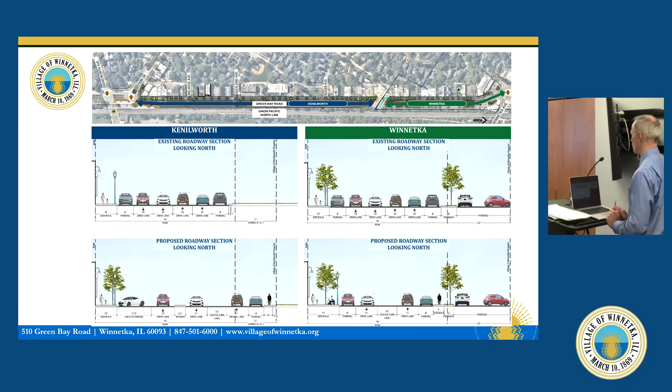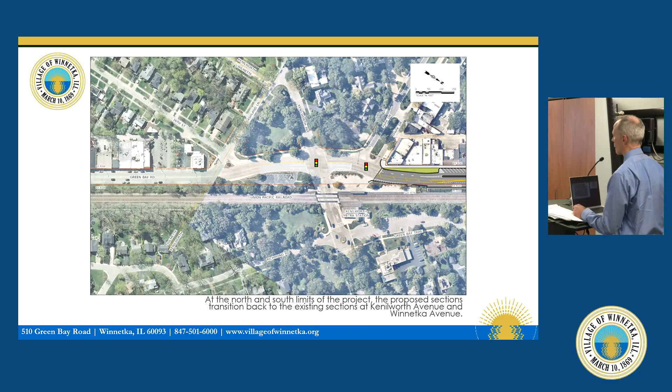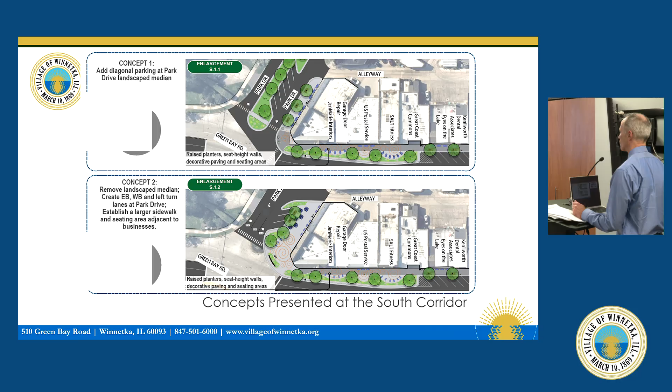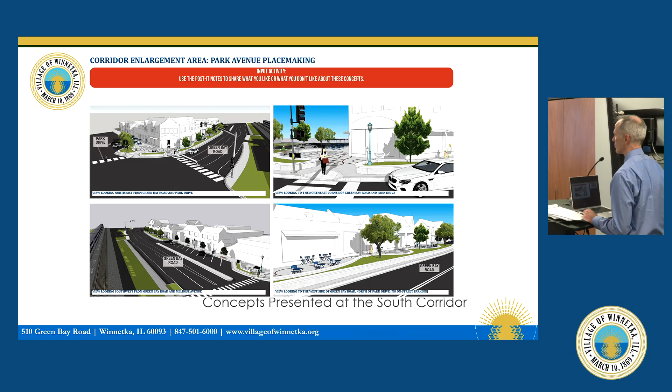Looking at the aerial views here, kind of starting at the south portion of the project, we'd be tying in at Park Avenue under the proposed concept. Some things that were looked at here as concepts were incorporating some diagonal parking along Park Drive, both on the south for one concept and on the north side for the other concept. These are shown here, and then also in this slide, there's some 3D images indicating what those options could look like.

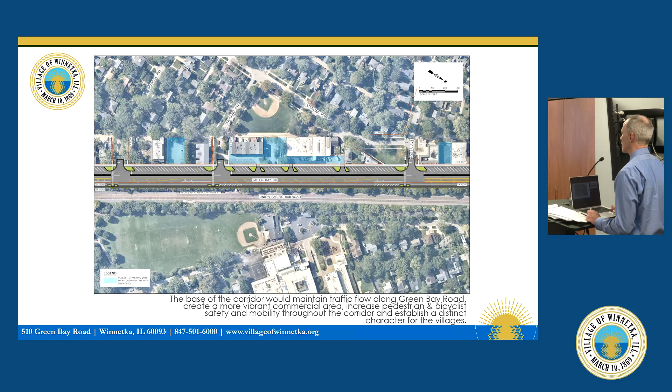Moving a little bit further north, here you can see the proposed plan and the diagonal parking that will be incorporated into the portions from Kenilworth. Within this area, as I mentioned before, you have the diagonal parking separated from the 3-lane Green Bay Road.

Here's some details of the area. The area on the right shows by Wayland Avenue what the section could look like. Essentially, you'd have the frontage roads with diagonal parking in that area, and here there'd be some proposed locations for crosswalks in the area.

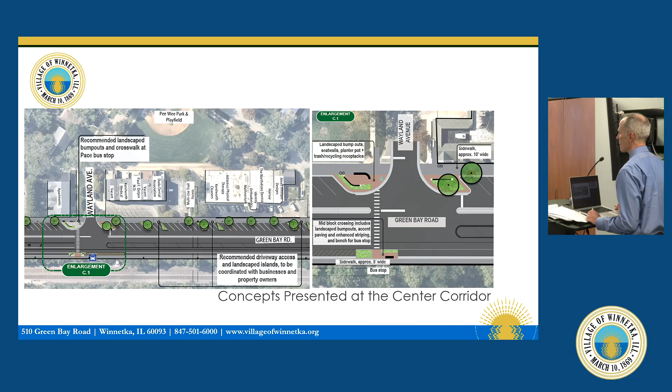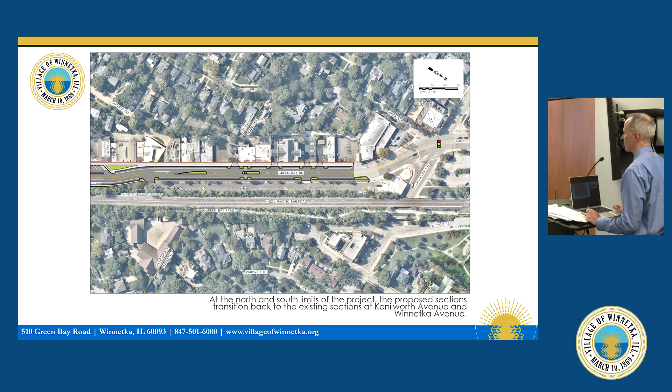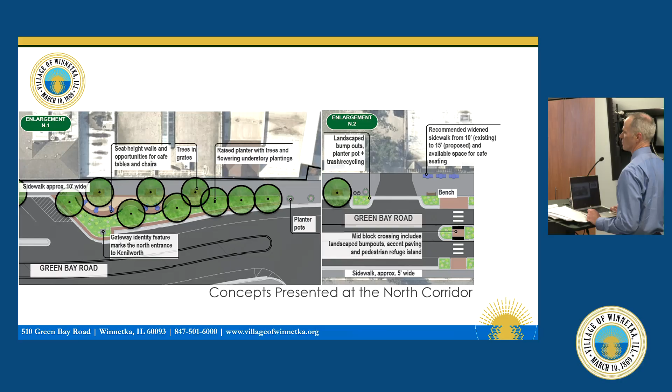Just for clarity, that's south of Winnetka Avenue, right? That view is all just up to Winnetka Avenue. Okay, yeah. Everything ends south of Winnetka Avenue.

Some other things that were looked into were different types of lighting standards, some gateway identity features, and then different furnishing options within the area. These were presented at the public meetings where people could cast their votes with a sticky note to place what their preferred options were. Some of the 3 different types were the Tudor on the left side. The middle one would kind of merge the 2 districts between Kenilworth and Winnetka. And the third one featured stone and masonry.

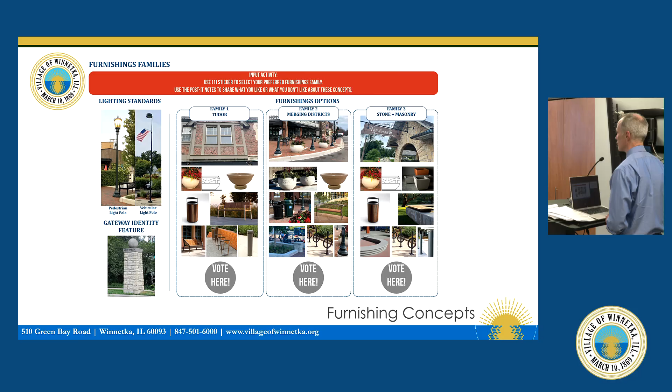As far as parking goes, within the village of Kenilworth, we did an estimate, assuming a 20-foot parking stall for parallel parking. With that, we came up with 162 parking spaces there. Under proposed conditions, the low number that we had with the diagonal parking was 163 spaces, and the high number was 170, but that would involve providing diagonal parking across some of the entrances to parking lots. So the thought there was, there could be some coordination with some of the businesses to see if access to the parking lots could be obtained through some other means, whether that's an alleyway or something like that.

Within the village of Winnetka, the existing parking was 61 spaces. Under the proposed conditions, it would be 55 spaces. The main difference there for the decrease is we provided some curb bump outs for some locations where the pedestrian crosswalks would be.

So as I mentioned before, there were some public meetings in February of 2024, both in Kenilworth and Winnetka. I won't go through every comment, but some of the main comments were that the public felt the road diet was a good idea.

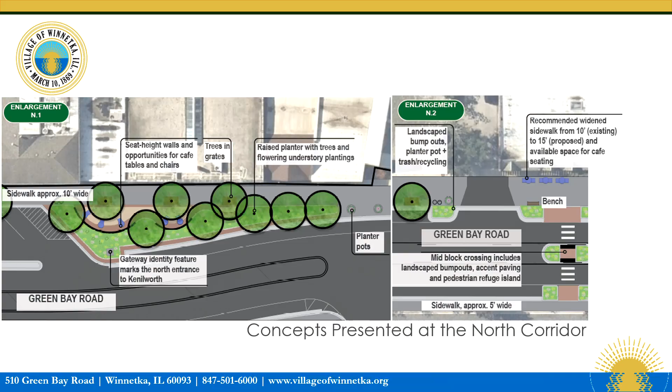Yeah, I think that's a good possibility, and Teska would be more of the experts on how to handle that. But if you have the 15 feet, you can use it in a number of different ways. I'm thinking Marco Romo is largely a takeout delivery service, Aboye has theirs, but maybe they want to reclaim their parking. Who knows? I think it would be helpful to think about how we could improve it, because you just look at that and it looks like a ton of concrete. If we're going to do some improvements, wouldn't it be nice to increase the trees?

So this concept here doesn't include things like, to Mark's point, when we get into the details, we were planning on adding parkway trees like we've done before. So what you'd start to see is a row of canopy trees that would continue through. We'd look at creating seat walls and bump out areas with vegetation, so we'd be enhancing it. This was really just the layout, conceptual, just the structural part. It does look like a big slab of concrete, but our intent was to add trees in critical locations, like we've done in the streetscape. And then put tree grates so we can light them all, with pedestrian lights along the way.

That would be part of the updated phase 2 design conceptuals you would see, like the Teska ones that Jody brings in. You'll start to see this. This was really more about how do we see the roadway configuration going, where do we see the changes being made. The sidewalk's getting wider, there's a center turn lane, but we're adding some median islands. So this was really just about what the layout overall looks like. Those details will be coming as we advance that more.

I think that will make it feel less empty, and may attract some new restaurants, right? Even though it's pretty static right now, or that empty lot that I always wonder why is it empty, next to Captain Nemo's. I don't know if that's Winnetka or Kenilworth. That's Winnetka, I mean it's kind of strange.

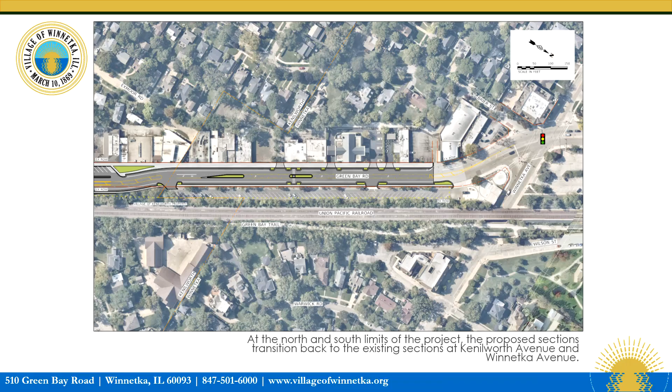Yeah, got it. And anybody who's driven down Green Bay Road heading south, there's always cars that park right at that bend, and traffic merges right into one lane as it currently is right now. This would just solidify it. Any other public comment on this topic? Seeing none, we'll close public comment. Any other thoughts?

I guess I would say, if there's no objection, maybe ask the council to defer consideration of policy direction at this time until Kenilworth determines their next steps, since they're the lead agency on this project. That makes sense, and it'll come back to us, obviously. We'll learn more. Mr. Johnson, thank you very much. We appreciate it.

Okay, well, thank you so much. And Jim, thank you for your thoughts. Scott, thank you. Okay, we'll move on to item ordinances and resolutions, item 9A.

Ordinance number M18-2025, granting a special use permit for the operation of a medical office within the C2 Commercial Overlay District of the village, at 730 Elm Street, Suite 130, part of the One Winnetka project. Tonight, council will consider granting a special use permit for the operation of a medical office in the One Winnetka building. Community Development Director Scott Mangum is here to review the topic.

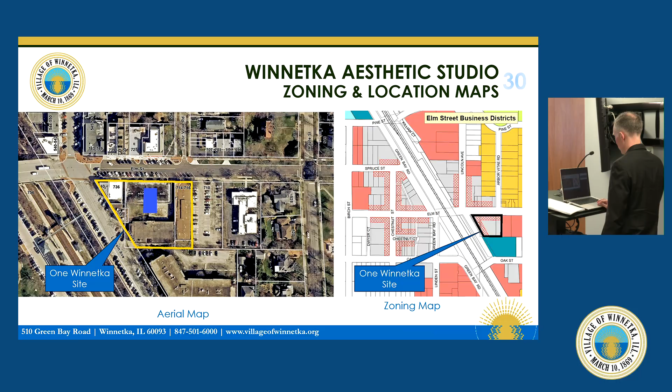Hello again, Scott. Thank you. So as stated, this evening the applicant, Winnetka Aesthetic Studio, is proposing to open a Winnetka location of an existing cosmetic surgery practice that is currently located within Chicago. This would be located within one of the commercial spaces in the One Winnetka building. This shows the location, as folks are familiar, at Elm and Lincoln, currently under construction. The property is located within the C2 general retail commercial, and a portion of it's within the overlay district.

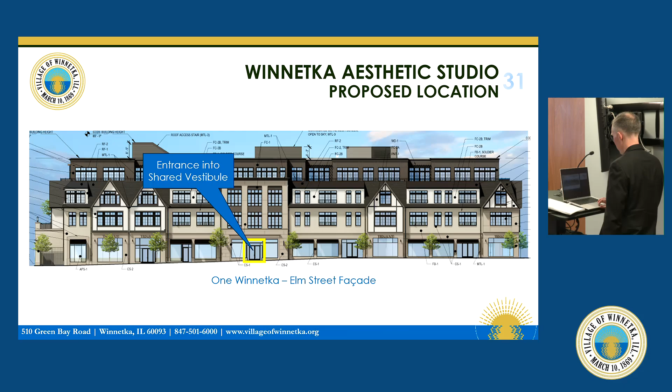So the proposed entrance to the location is outlined in yellow here, off of Elm. The tenant space would start about 15 feet back from the street frontage. However, it would still be within that overlay area. There would be a vestibule entrance for 3 tenants at that location.

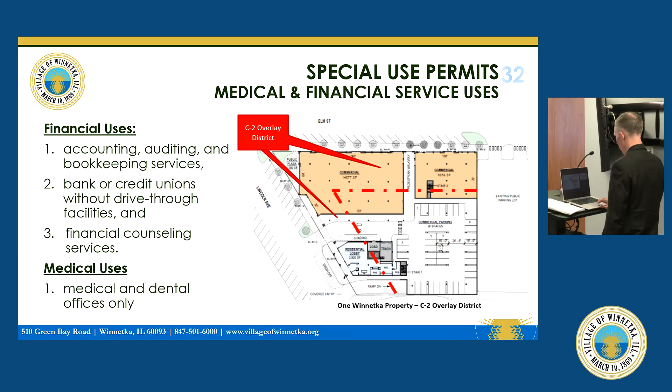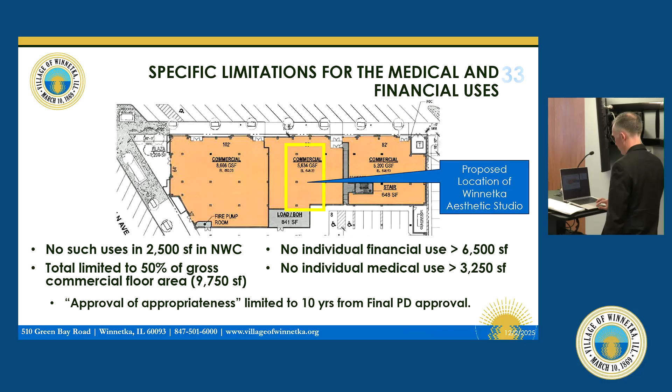So when the council granted the final approval of the planned development for One Winnetka, it also granted partial approval of certain special use findings for medical and financial services. The Charles Schwab office that was approved recently is one of those considered as part of the planned development agreement. The location and amount of space occupied by medical and financial uses are limited in that PD document and ordinance. Charles Schwab would occupy approximately 5,500 square feet at the northeast corner of the building, and all these limitations shown here would be compliant with the proposed use.

So the medical office is proposing a commercial space of about 1,800 square feet. Again, no street frontage directly on Elm, but there would be that shared main entrance. It would comply with those limitations in the PD ordinance.

According to the applicant, who's present this evening, the office would have a maximum of 4 to 5 employees on a typical day, with hours from 7 to 7, Monday through Friday, and 10 a.m. to 4 p.m. on the weekend. They anticipate an average of about 24 patients per day, with appointment times of about 30 minutes for quick treatments such as laser treatments, microneedling, facials, and injections. The office would also have an on-site surgical center allowing for various procedures ranging from 1 to 3 hours per visit, with patient volume decreasing to 3 to 5 patients per day on surgical days.

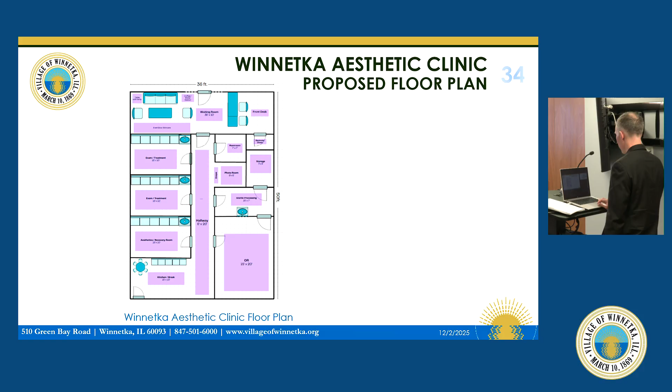The applicant states that the front waiting area of the office would feature retail displays of skincare products that could be purchased by customers.

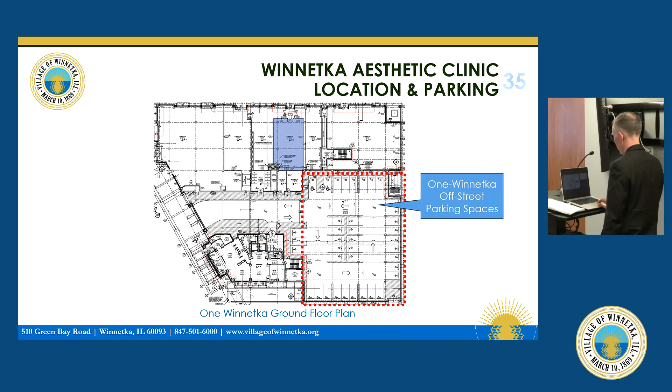For parking, the applicant is proposing that its employees secure the necessary parking permits within the A district and then park in the village-owned parking lot adjacent to the One Winnetka building to the east. There is surface level parking for customers within the One Winnetka building, shared with other tenants in the building.

This was reviewed by the Plan Commission on October 22nd. After hearing from staff and the applicant and receiving no written or verbal comments from the public, the Commission discussed the request. Commission members found that it would be a good fit for the One Winnetka building and commented on the fact that the space the applicant would occupy would not have street frontage. Ultimately, by a vote of 7-0, the Commission recommended approval of the request.

With that, this evening, after hearing from the applicant and the public if desired, given the Plan Commission unanimously recommended approval, Council may wish to either consider waiving introduction of the ordinance and consider adoption, or consider only introduction. As a note, this ordinance does allow for 18 months until the start of construction of the tenant space instead of the typical 12 months, due to the building being under construction. That concludes the summary of the request.

Thank you. Okay, I'd kind of like to hear from the applicant. Would others maybe have the applicant come up and just introduce themselves and tell us what they're going to be doing?

Hi, my name is Paul Phelps, and I'm the owner of Chicago Oculofacial Plastic Surgery. I'm an oculofacial plastic surgeon, which means I trained as an ophthalmologist and then did subspecialty training in surgeries of the eyes and face.

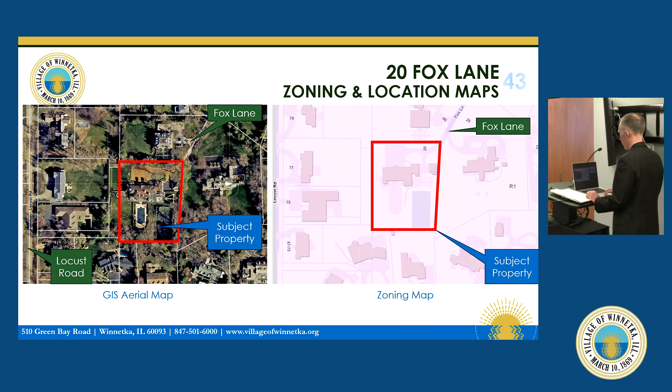The subject property is located on the south end of Fox Lane between Locust and Indian Hill Roads. It contains an existing two-story residence and detached garage, located within the R1 single-family zoning, with surrounding properties within the same zoning district. These are current photos of the main house and the detached garage on the site.

For context, the detached garage is directly opposite the east side of the house. This is a current photo of that detached garage and an existing storage shed. The proposal would involve removing the shed and building a one-story addition in its place on the south side of the garage. The council is considering the variation requested by the applicant to construct an addition to the existing detached garage. The highlighted area in yellow on the site plan represents the location of the proposed addition.

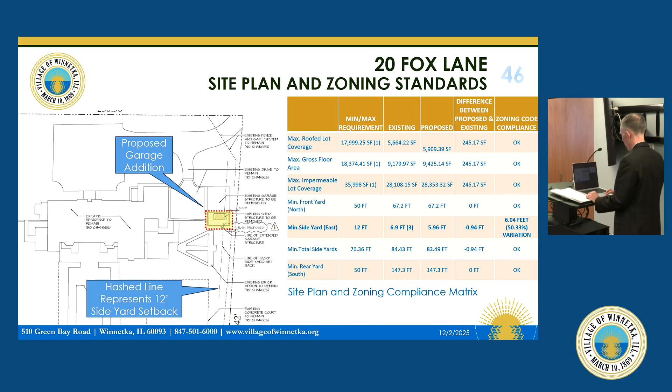The addition would continue the garage's east building wall, which currently encroaches into the required side yard setback of 12 feet, extending that non-conforming distance of 6.9 feet to a proposed distance of 5.96 feet from the property line. The property line on the east angles inward, a pie-shaped configuration for the lot, so this variation would be 6.04 feet from the requirement.

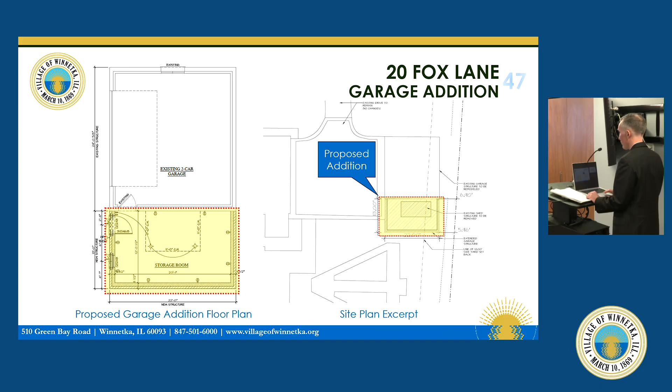This was reviewed by the Historic Preservation Commission on November 3rd. They conducted an advisory review of the proposed addition as required for an exterior alteration to a local landmark. The HPC determined the proposed alterations are appropriate to the preservation of the subject property and would continue to meet the criteria for designation as a locally designated landmark.

Additionally, the Zoning Board of Appeals considered the request on November 10th. After hearing from staff and the applicant and receiving no written or verbal comments from the public, they discussed the request. They noted the unique placement of the existing non-conforming garage and the limited scope of the proposed addition. Some members considered how the request met the hardship standard, while others pointed out that the addition would be small and not disruptive to the neighboring property. Ultimately, by a vote of 4-0, the board recommended approval of the request.

So with that, after hearing from the applicant and the public, given the unanimous recommendations by the recommending bodies, the council may wish to consider waiving introduction of ordinance M19-2025 and consider adoption, or consider only introduction this evening.

Thank you. The applicant is here, Scott. Would you like to introduce yourself and tell us what you're up to? Okay, well, come on up. Hi, I'm Brendan Carroll. This is my wife, Colleen.